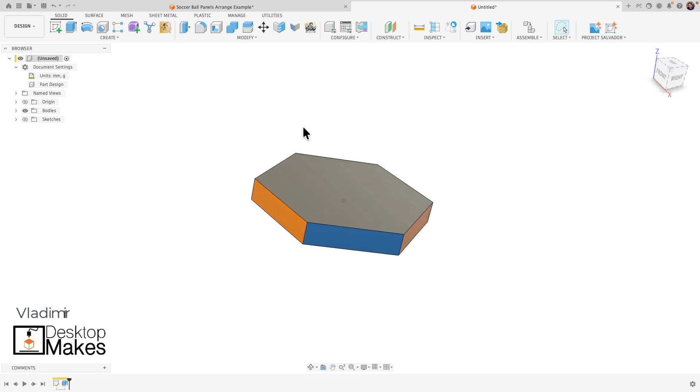The challenge here is to extrude a hexagon, but extrude it in a way where you have different angles for alternating sides. For example, we've got the blue and the orange sides here.

Now, when I come up with a problem like this, usually I'll just go the first route I'm thinking, or the first solution that comes to my head, which usually isn't the best approach.

But the great thing with 3D design is that there usually isn't one approach or one correct answer. There are usually multiple paths you can take to get there. Now, granted, one way may be more efficient than another, but as long as you get the job done.

So I'm going to show the first thought that came to my mind, and I'll let you know right now I don't think it's the best approach, but I want you to come up with a better approach.

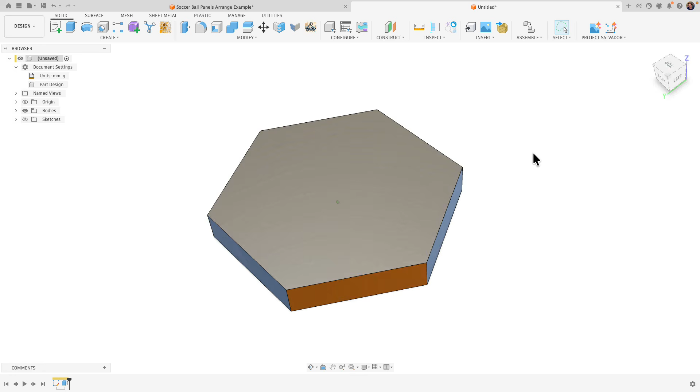So here I'll start with this video showing you the approach I initially took. I'll create a design, and I'll create our hexagon, come in with the polygon tool, take it, constrain it, and dimension it.

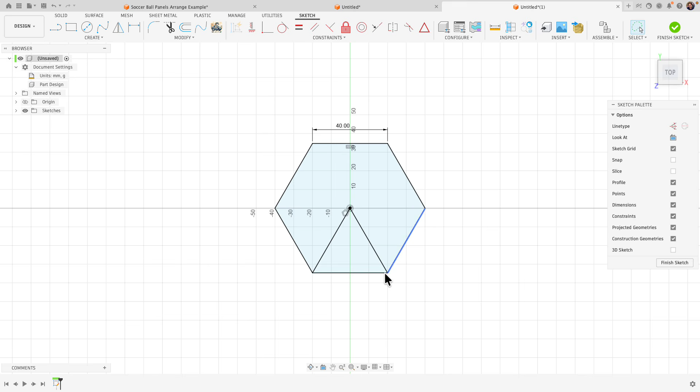Here, what I did is use this approach. I created a triangle from one of the sides, finish sketch, E for extrude. I'm going to go up 10 millimeters, and give this a taper angle.

And I'm going to use the exact taper angles that I need. In this case, 20.905 is one of them. You can see that tapers out a little bit right there.

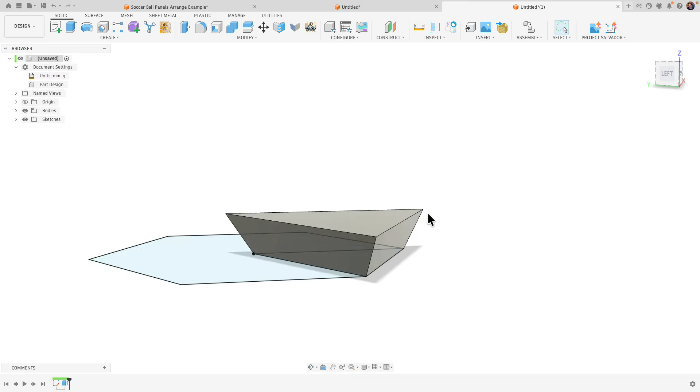I'll click OK. And then I took this one body and created a pattern. Do a circular pattern, select the body, axis of rotation is going to be the Z-axis. I only want 3 of these because it's a hexagon and I'm going alternating angles.

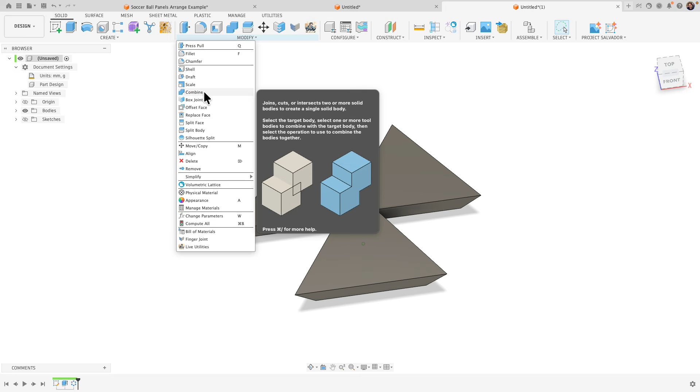Click OK. And then I will combine these 3 into one body, operation join, uncheck keep tools, click OK, and I have this shape here.

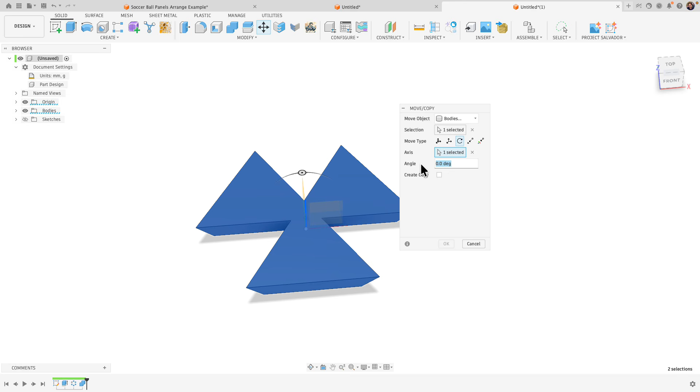Now I'm going to rotate this shape, so I'll go move, copy, select it, use my rotate. The axis of rotation, I'll choose the origin here, and the rotation angle is going to be 360 divided by 6 sides.

I'll let Fusion do the math there. Perfect. Okay, I'll untoggle bodies and grab that same triangle.

Because I rotated that body, this will go ahead and extrude right in between them. Same idea, extrude this 10 millimeters. Operation is going to be new body.

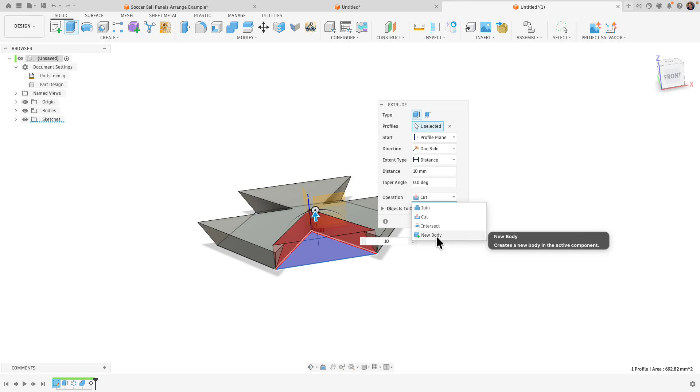Let me untoggle the initial body so we can see it by itself. Taper angle, I'm going to enter the other taper angle, which was 18.6885. Click OK. And then I'll just repeat the pattern, create pattern, circular pattern, choose the body, axis of rotation.

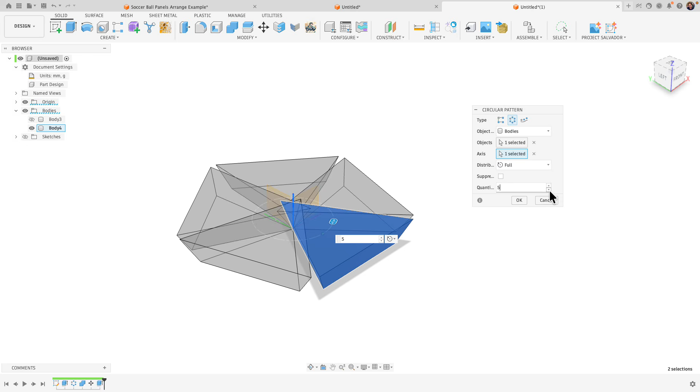Gonna make that 3. Click OK, modify, combine all 3 into one body, and now I have these 2 bodies here, and I have the angles I want.

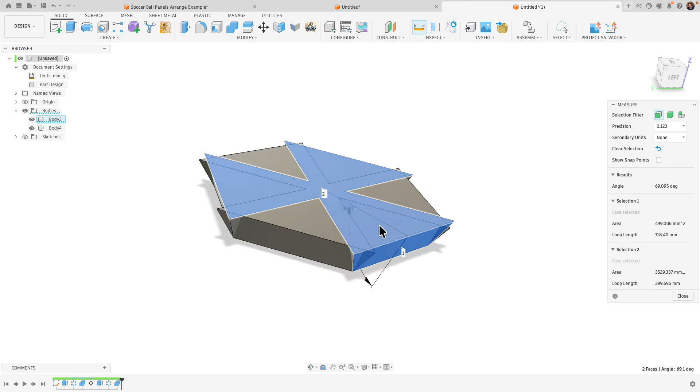So if I inspect between this side, measuring it again from the side to the horizontal, it's going to give me a different angle there. So that's 69.095, but what I want to see is that these alternate.

This one is 71.3, 69.095, and again 71.3. So perfect. But you see the problem where I've got these little parts here that stick out.

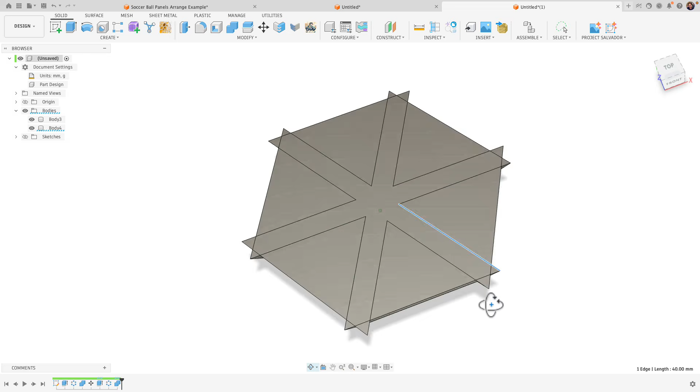So the way I chose to address that is, let's go ahead and combine this into one body now. So modify, combine those into one. So I still have these little hanging corners there.

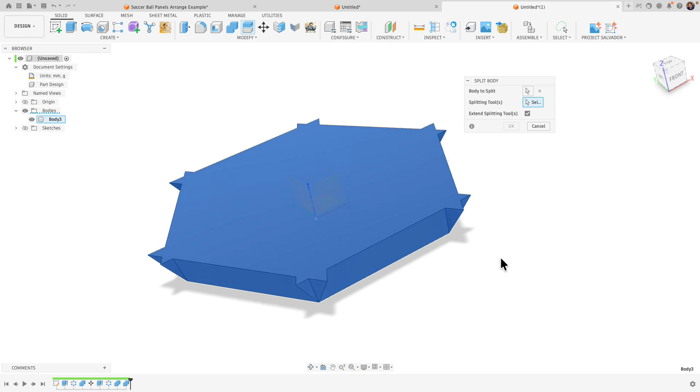So what I did next is go modify, split body, choose the body here as my splitting tool. The nice thing with the split body command is you can use the existing surface of the same body to split that body. So what I did was go ahead and just repeat that on each face here.

A little bit repetitive, but there's only 6 sides here. So once I do that, you can see that it'll draw a line across it, letting you know that it's split. So if you look at the top here, and then I split it, you can see that goes across.

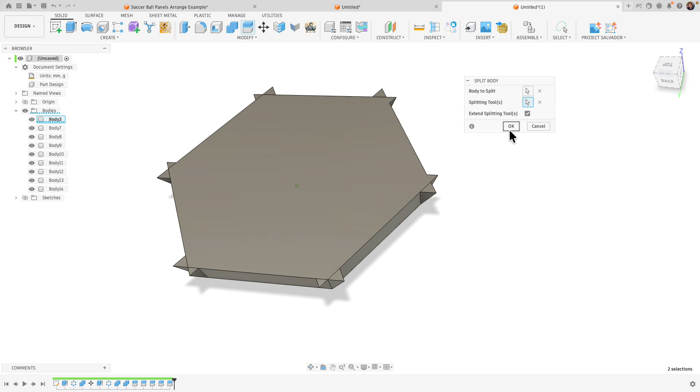One more to do here. Click OK. All right, perfect.

So now we end up with all these additional bodies here that we don't need. So what I'm going to do is shift select from that second to the last body, right click, go to remove, and I'm left with just the one body that I need, which is here.

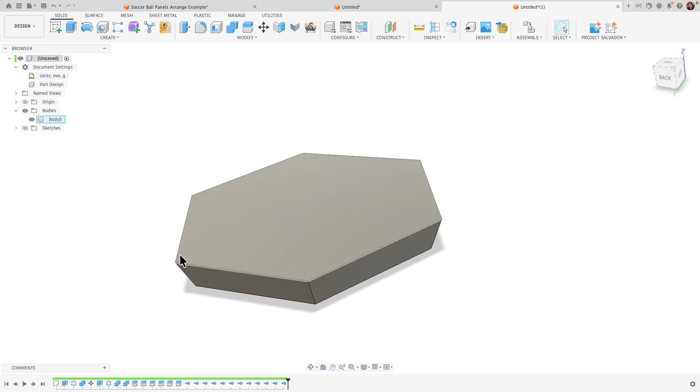All right, and that gets me to exactly where I want to be. Again, just to verify, 71.3, 69.095. So I've got alternating angles here.

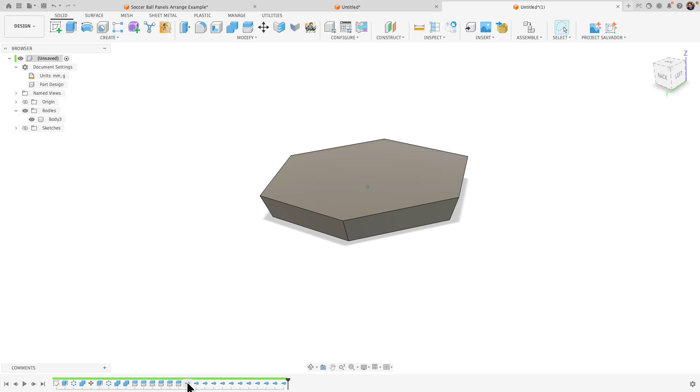And here's another tip on the timeline: because I've got all these remove body features, it sort of clutters your timeline. So what you can do is shift select the first and the last, right click, and create a group, and it goes ahead and collapses them into one, so it doesn't clutter your entire timeline.

Okay, so this is one method of solving that design challenge. But like I said, it's not the most efficient method. There's a lot of steps here, especially when you consider all the split body and remove body commands. So your challenge here is to come up with a more efficient way.

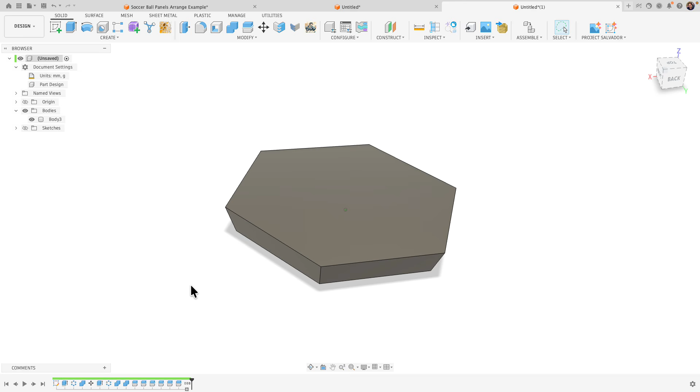Now, I've already got some comments on my previous video, so I'm keeping records of those, and hopefully I'll get some more on this video, and then I'll do a follow-up video showing the best approaches.

If you want a little more background on the challenge, watch the video before this. All right, guys, looking forward to seeing your response.